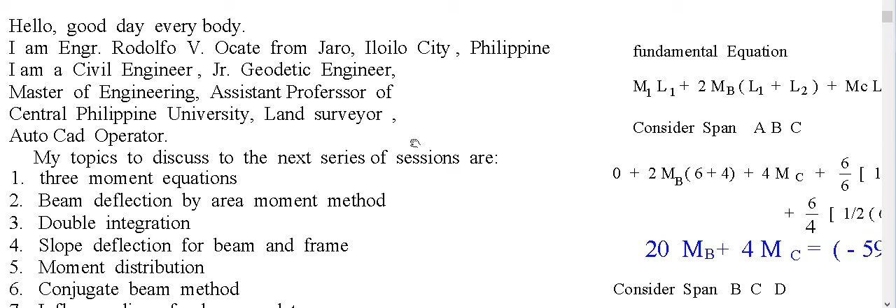My topics of discussion for this series of sessions are: 1. Three-moment equation, beam deflection by area moment method. 3. Double integration, slope deflection for beam and frame. 5. Moment distribution. 6. Conjugate beam method. 7. Influence lines for beam and trusses. Other miscellaneous topics such as hydraulics, physics, mechanics, and so on.

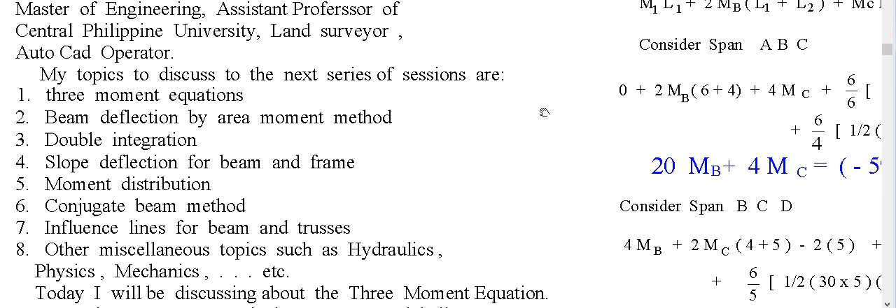Today, I will be discussing about the three-moment equation.

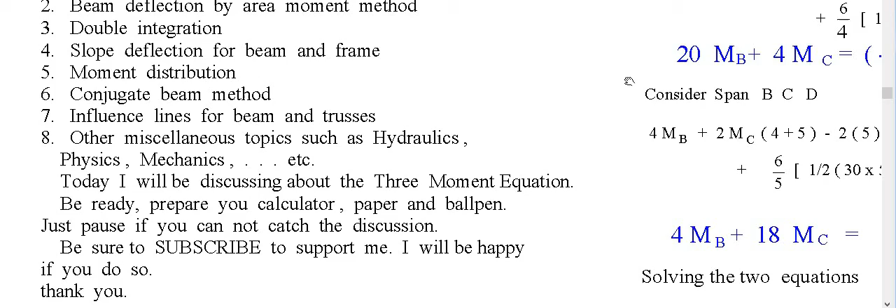Thank you. We have this first problem, a three-span beam with the loadings: uniform load of 11, 8, and concentrated load of 15 and 2. Corresponding distances are 6, 4, 2, 3, and 1. The 1 is for the overhang.

Now in this fundamental equation, we are considering two spans at a time. So L1 and L2 only, or A, B, C. Two spans at a time.

So the basic formula: we have M1, L1. M1 is the moment at A on the left. Then L1 is the distance on the left. Then twice the moment at B.

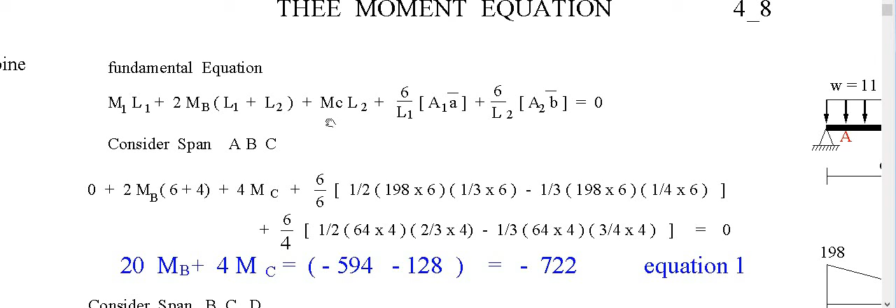Or I can say moment at B is at the center of the two spans. Then L1 plus L2 is the sum of the two spans at the middle. Then on the right, MC times L2. So MC here, then the span that we are using is L2.

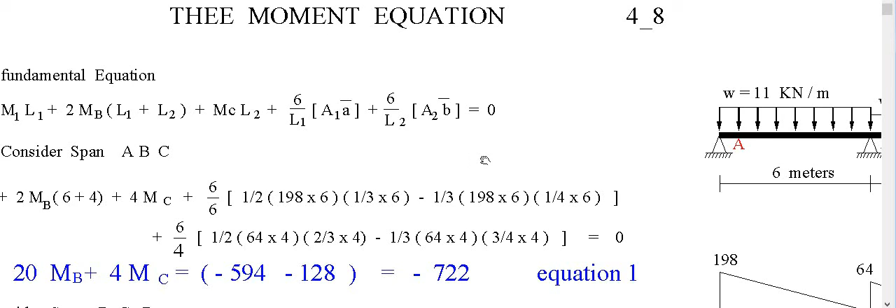Then plus 6 over L1 per span. Then area 1 times distance from the left, or A. The area 1 is this one. Area 1 is composed of two areas, positive and negative.

Then A is the distance from the left, or at A. Area 1, these two areas, times corresponding distance from the left, or A. Then plus 6 over L2, this one.

We are now considering the second span over L2. Area 2 is the area of these two moment-by-parts. Then B is the distance from the right, from here going to the centroid of this triangle. Then from C going to the centroid of this triangle.

The distance is represented by letter B. Letter A is for this one, from the left. Then equate to 0.

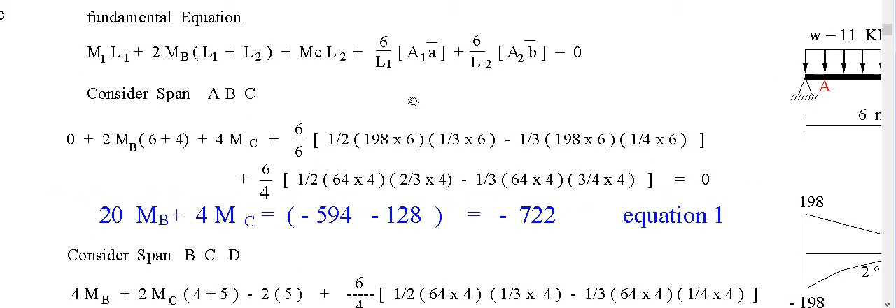Then substitute. Consider the span ABC. The first one, the moment at A is actually 0. Then twice the moment at B, distance 6 plus 4.

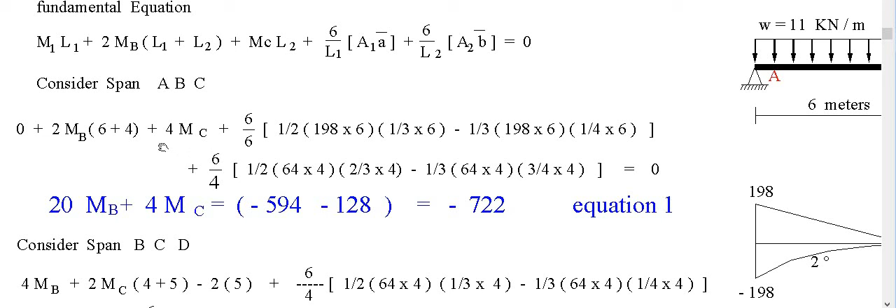Then moment on the right, 4 times moment at C, this one. 4 moment at C plus, okay, 6 over L1.

First, I have to discuss, before we go to this, how to make this moment by parts. Actually, the three-moment equation is simplified for computing the simple beam reaction at B and A using the uniform load.

Of 11, span of 6. You consider AB as a simple beam. So the total load is 66. Split that into 2, A and B. Reaction at A and B are equal.

The reaction at B is 66 divided by 2, which is 33. This is not the actual reaction at B. It is a prop or dummy reaction because we are considering this as a simple beam. Reaction at B as a dummy is 33.

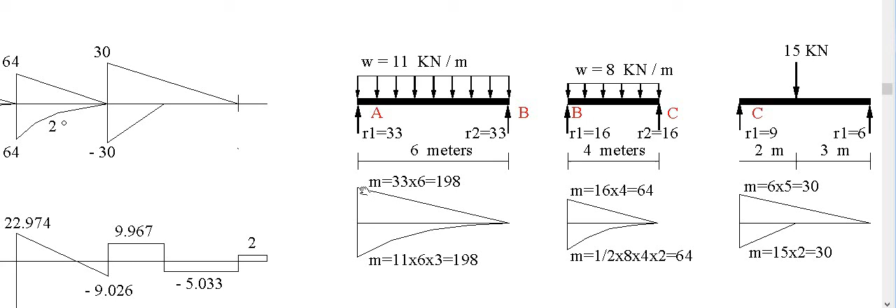This is negative, this is positive. So the sum of these two moments must be 0, because in a simple beam, the moment on the left and moment on the right must be 0. So moment must be 0 here. The sum of this positive and negative must be 0. So this is the one.

Then moment by parts on BC, consider it as a simple beam. The reaction or prop reaction at C: we have the total load as 8 times 4, which is 32. Split that into 2 equal parts. Reaction 32 divided by 2, or 16.

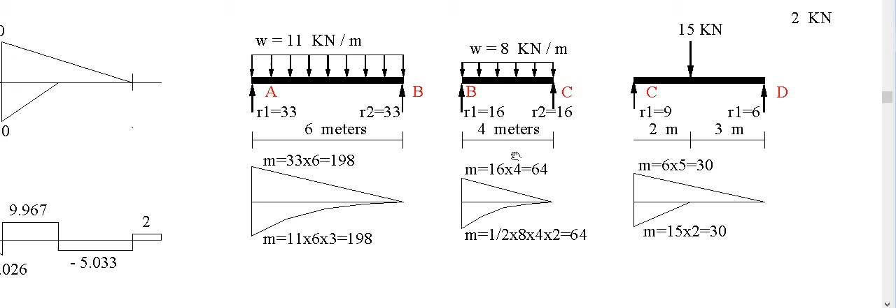The reaction at C is 16. Reaction at B is also 16. Now the force 16, if you pivot that on B, so 16 times 4 is 64. The moment by parts at B is 64. The moment by parts for the uniform load, this is a second degree, is 8 times 4 total load.

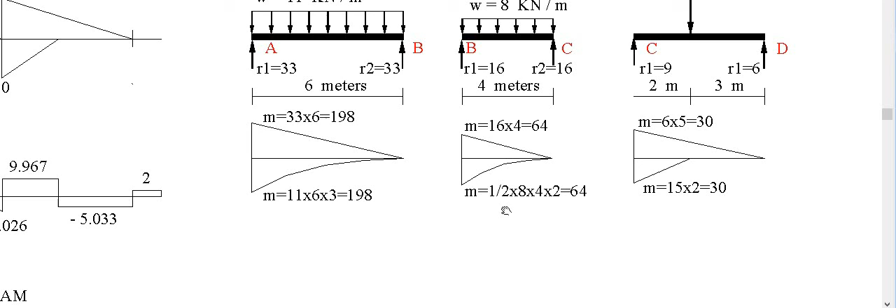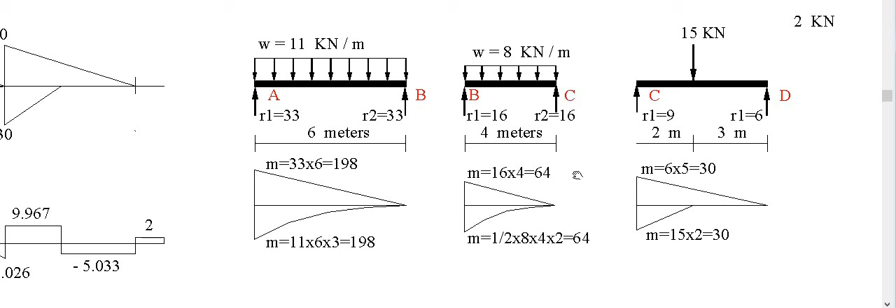This must be also 64. I think there's some correction. The moment at B is 64. Moment at B for a negative is also 64. Okay, this is supposed to be, the moment here is 8.

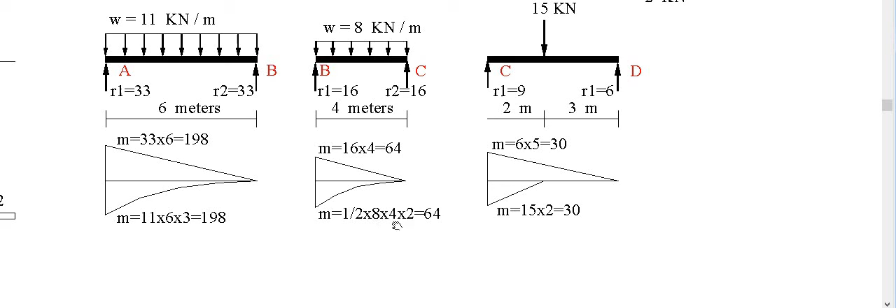8 times 4 times 2 is 64. No, 1/2.

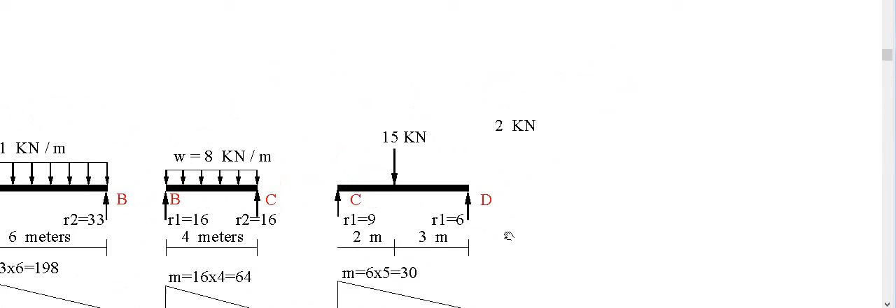Okay, for the right span CD, the moment by parts is the reaction at D. If you take moment in simple static solution for reaction at D, it is equal to 15 times 2 divided by 5, or this is 6, the reaction. Okay, simple static computation of the reaction at D. 15 times 2 divided by 5 is 6.

So that moment by parts, reaction at D, bring that to pivot C. 6 times 5 is 30. And also this concentrated load of 15, bring that to pivot at C. 15 times 2 is also 30.

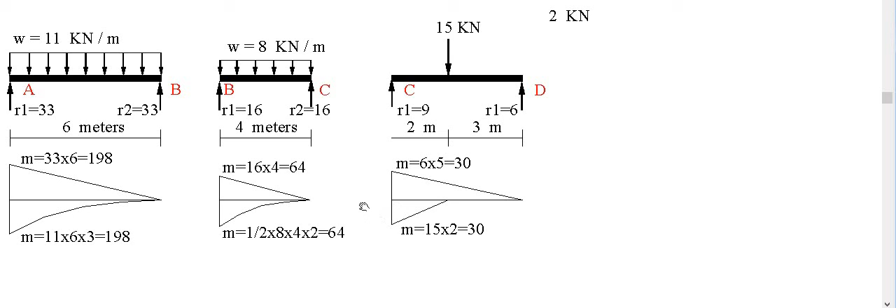This is supposed to be negative, positive. So the sum of the two moments must be 0 at C. It is a simple support. Okay, I hope you knew how to interpret this or how to compute this. 198, 64, 30, 30, 64, 198.

Okay, then substitute this to this equation. This formula 6 over L1. Okay, so we have the first span, 6 over L1 is 6. The area of this is 198 divided by 2 times 6, times the distance from here up to the centroid is 1/3 of 6, minus this lower parabolic 1/3, 198 times 6 times the distance of 1/4 of 6. This one, 1/4 distance from the left.

Then the second span, 6 over L2, which is 4. Then the area of this is 1/2, 64 by 4. Then the distance must be on the right. This is the first span, this is the second span. The origin of measurement of distance must be on the right for the second span.

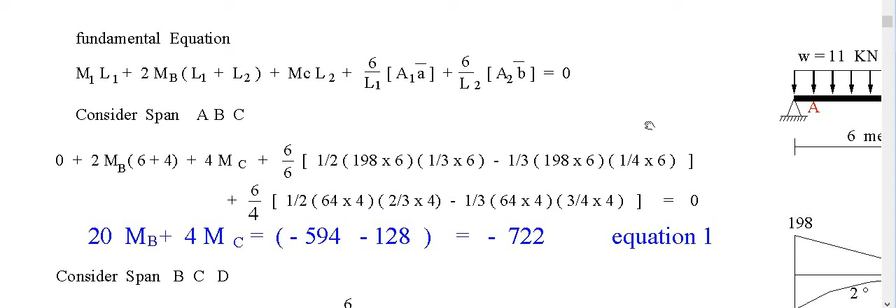Now this 6 plus 4, 10. 2 times 10, 20. 4 MC. Simplifying this term, it is minus 594. This one is minus 128. So the sum of this is negative 722. This is negative because from this equation, these two terms are positive.

Transfer that to the right of the equality of the equation. So positive here, transfer to the right becomes negative. And also interpretation of this: usually the moment at the support is negative at B and moment at C is negative. So these two terms must be negative.

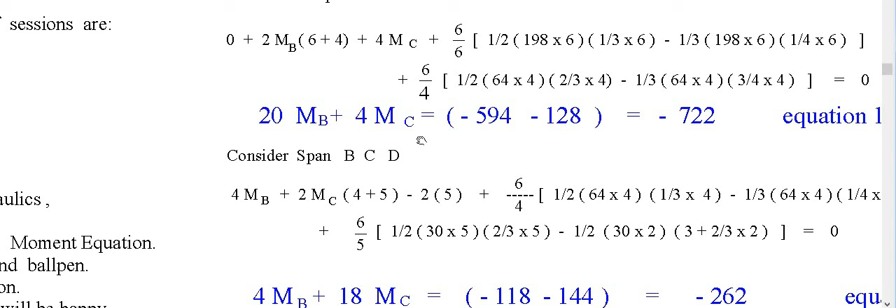Okay, negative. Then consider the second two set of span, B, C, D. Okay, these are the moment by parts, 64 and 30. Okay, we are now in the second two set of span. So the moment on the left is B, and this is unknown, moment at B. Then the span is 4.

So it is 4B, 4 times moment at B. Then moment at the center, twice the moment at C. The sum of the two spans is 4 and 5. Minus, okay, minus 2 times 5. Minus 2 is the moment at D.

Okay, I will show this to you. The moment at D is 2 times 1 and negative. 2 times 1 is minus 2. And the distance, okay, so is 5. Okay, so I will explain this.

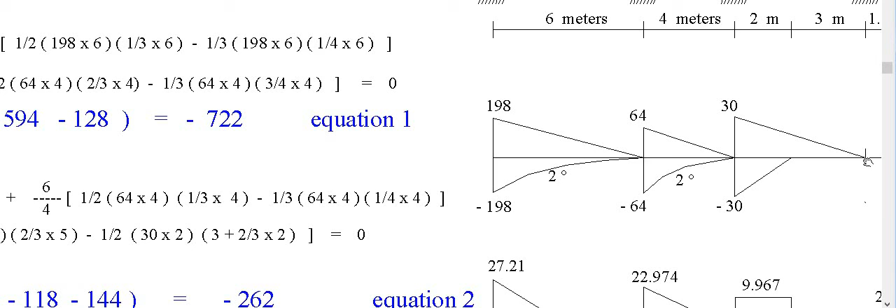2/3 of 5. Minus this triangle 1/2 30 times 2. Distance from the right is 3 plus 2/3 of 2. Again, this is 3, then 2. So the distance of the centroid from the right is 3 plus 2/3 of 2. Then the whole thing equate to 0. Okay, equate to 0.

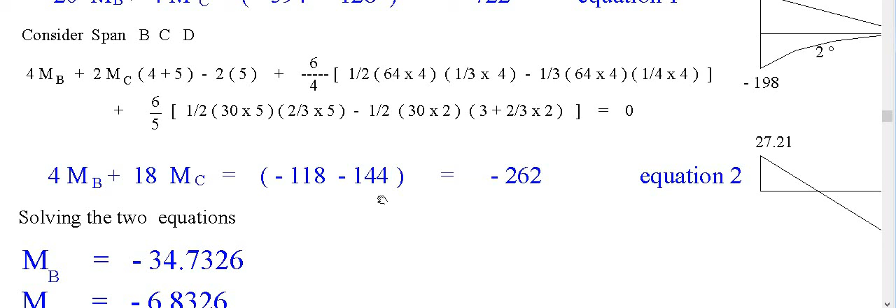Okay, simplifying, this is 4MB, 2 times 9, 18 MC plus, transfer this to the right of the equation, becomes minus. So the whole thing here is minus 118. Then the second expression here is minus 144. The sum is 262, minus 262.

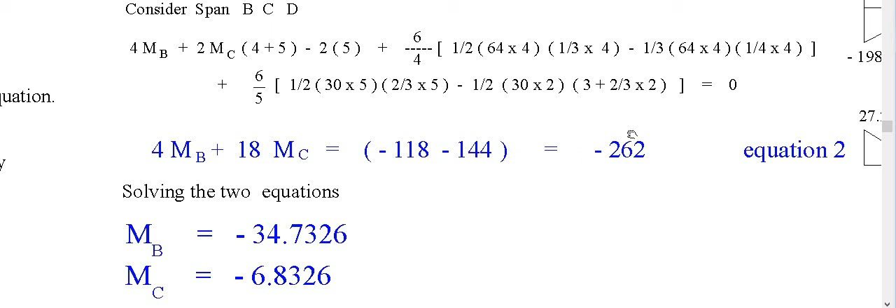Again, this must be minus since usually the moment at B is negative at the support. Moment at C is also negative at the support. These two must be negative and the answer here must be negative.

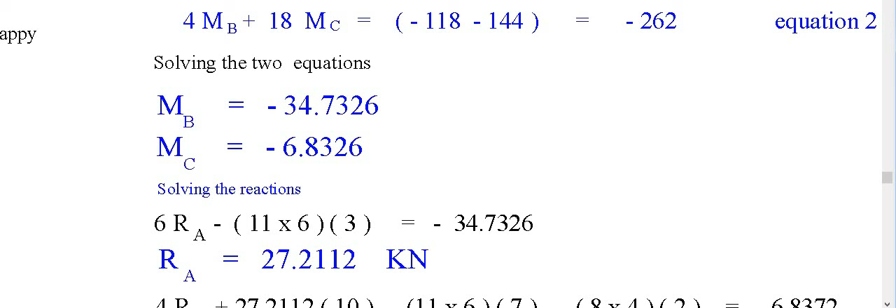Then solving the two equations 1 and 2, this is the result. Moment at B is minus 34.7326. Moment at C is minus 6.8326. Okay, simple as that. It's a tedious job, but it is simple.

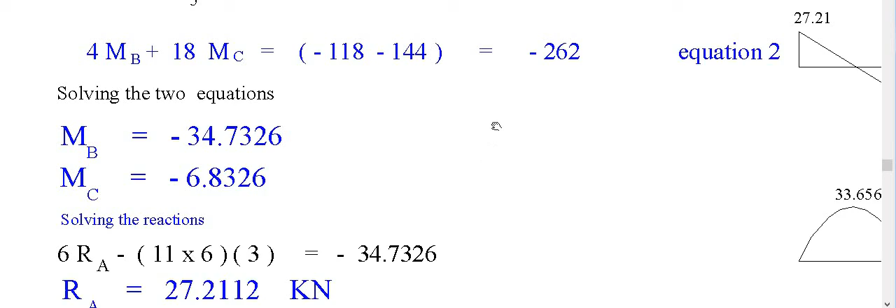Then solving the reaction. Okay, to solve the reaction at A, I have to copy this. Copy. Bring this to the...

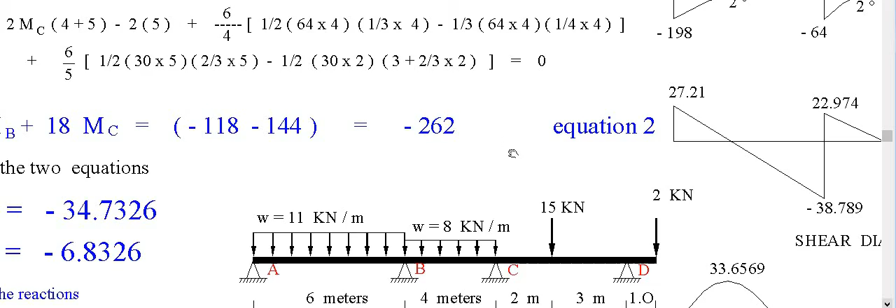Okay, reaction at A. Consider the span AB. You cut the beam at B. Consider the span AB. You cut this, then there is a moment appearing here. Don't consider this on the right. Don't consider this, just AB. And there is a moment at B. Okay, the moment at B is minus 34.7326.

Okay, so take moment at B, RA times 6 minus this 11 times 6, centroid is 3, going to B. Then the whole computation of moment equate that to the moment at B, which is minus 34.7326. Then solving for RA, it is 27.2112. Okay, so this is now solved.

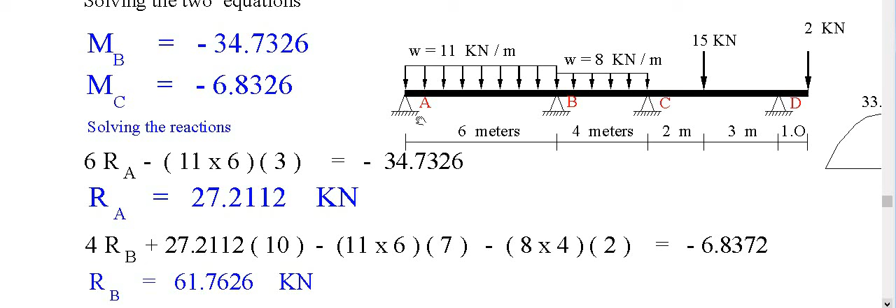The reaction, this is the actual reaction at A. Then solving for RB, consider the span ABC. Okay, unknown reaction at B. Reaction at A is already solved, 27.

Okay, take moment at C, which is minus 6.8326. Moment at C. So we have 4RB, moment due to the reaction at B. RB is unknown. Then plus the reaction at A, 27.2112 times 10, 6 plus 4. Then minus the uniform load of 11. Total weight is times 6, 66 times distance of 4 plus 3, 4 plus 3 or 7.

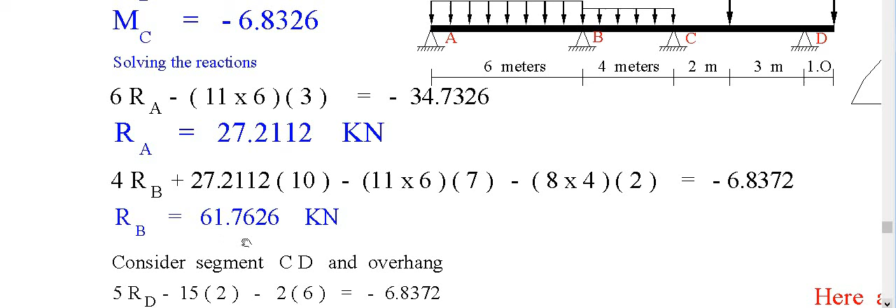Uniform load of 8. Total weight is 8 times 4. The distance going to C is 2. Then equate this to moment at C, minus 6.8372. Okay, we have only one unknown, RB. Solving, it is 61.7626. Okay.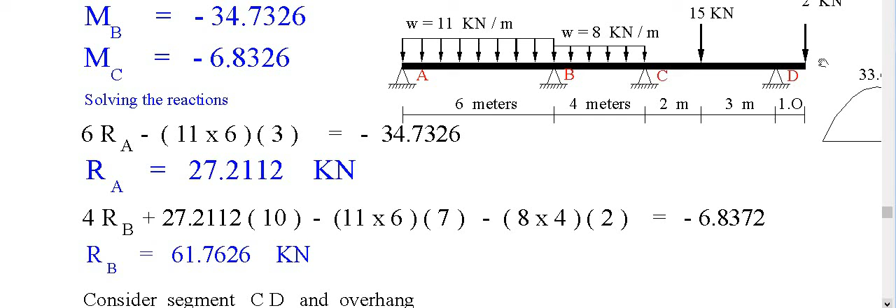Now we have to solve RD. Consider the right portion of the cut section. You cut this section at C. There appear the moment at C. Then we will solve RD on the right. Okay, CD and the overhang. Have to move this.

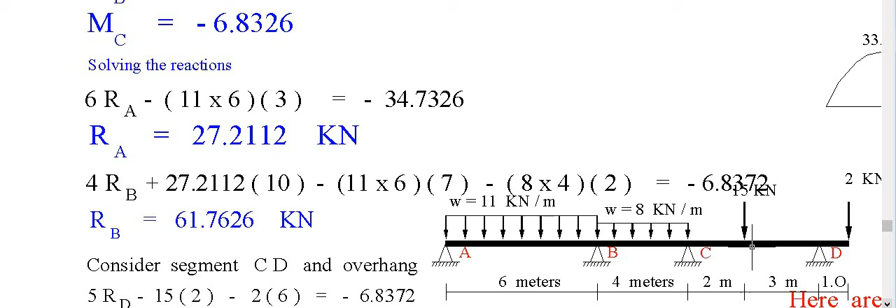Okay, RD. Consider span CD plus overhang. We have RD times 5. Okay, minus the concentrated load of 15 times 2, moment at C. Then minus 2 times 5 plus 1 or 6. Then equate that to the moment at C, which is 6 point, okay, moment at C, minus 6.8326. Then solving for RD, it is 7.0326.

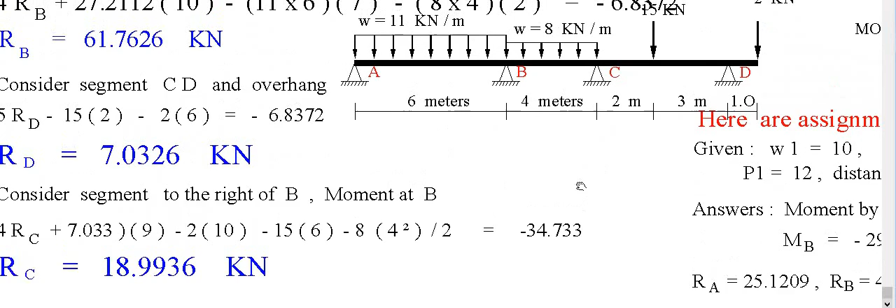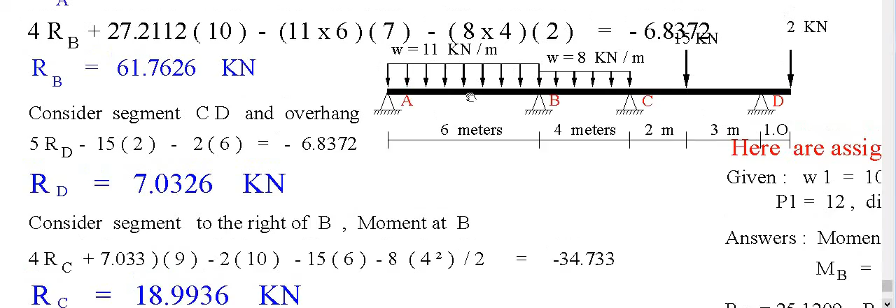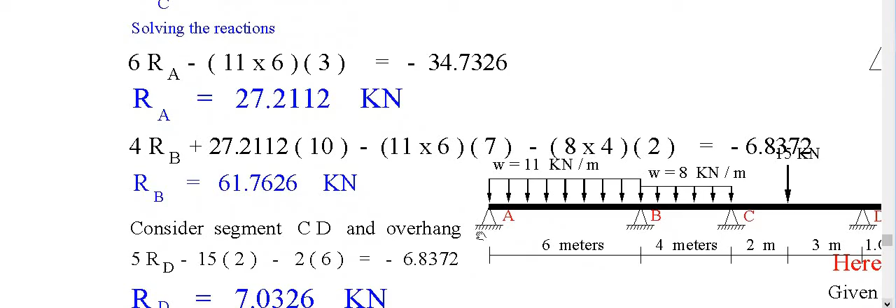Okay, then in order to solve for RC, consider the span BCD. This is given now. The RD is given, RC is unknown. Then consider the cut section BCD. So we have a moment here at B, which is moment at B is minus 34.7326.

So okay, we have RC times 4 plus reaction at D, 7.033 times 9, 4 plus 5, 9. Then minus 2 times 10, 2 times, this is 4 plus 2 plus 3 plus 1, this is 10. Then 15 times 6. This is 15 times 6.

Must be corrected. Minus this, 8 times 4 times 2, 8 times 4 times 2. One of the 4 must be divided by 2. Correction here, this must be 15 times 6.

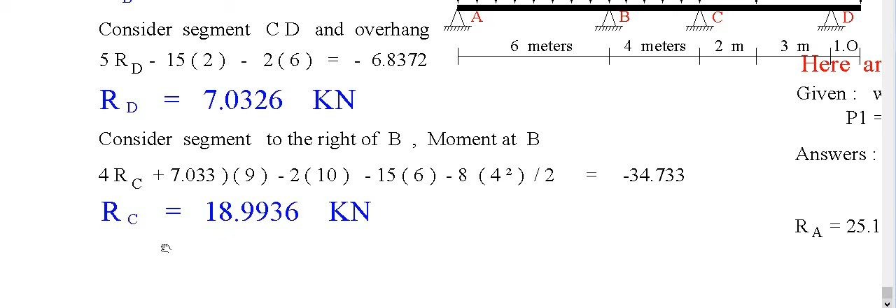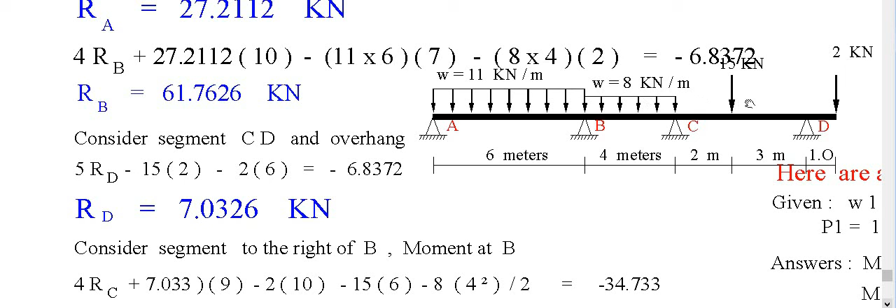And equate that to 34.733. Solving, just check this, RC is 18.9936. You must also check the sum of RA, RB, RC, and RD. It must be equal to the external load, the sum of this.

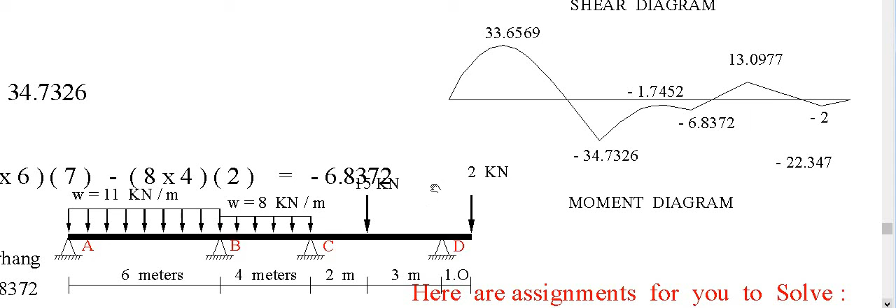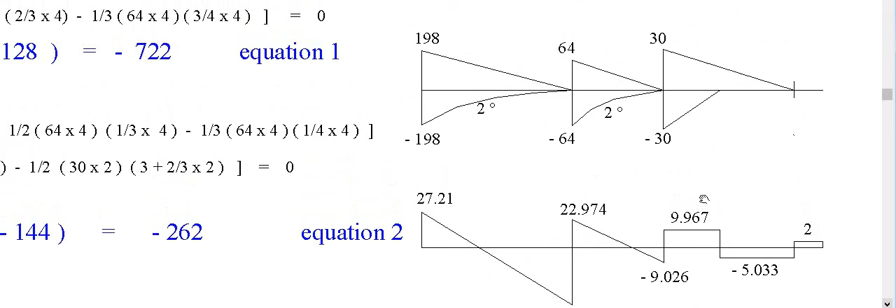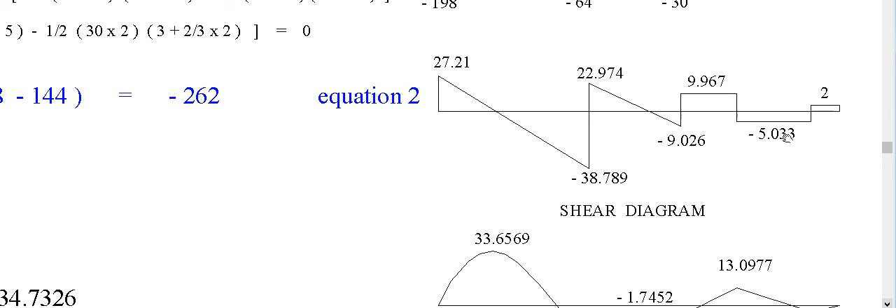Anyway, we can check this from the shear and moment diagram. So given now the forces, we can draw the shear diagram of this reaction at A, and the moment diagram will look like this. Okay, I will not discuss this because this is under the strength of materials subject. The moment diagram is this.

Okay, now that's all for the discussion or explanation on how to solve the multi-span by moment by parts, 3-moment equation. Now you have to practice this.

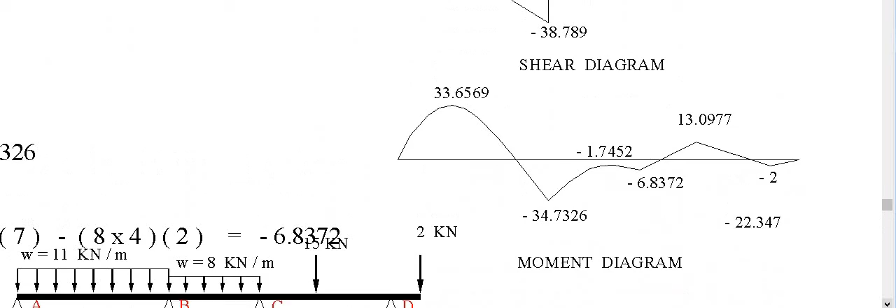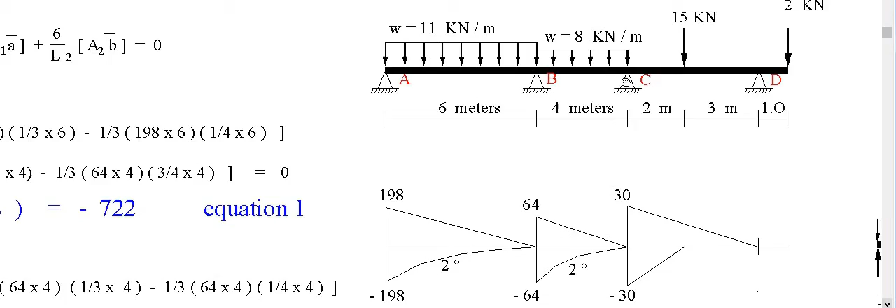Here are the assignments for you to solve. Given W1 10, W2 is 4, instead of 11, this must be 10 and this must be 4. Change that data. W1 is 10, W2 is 4.

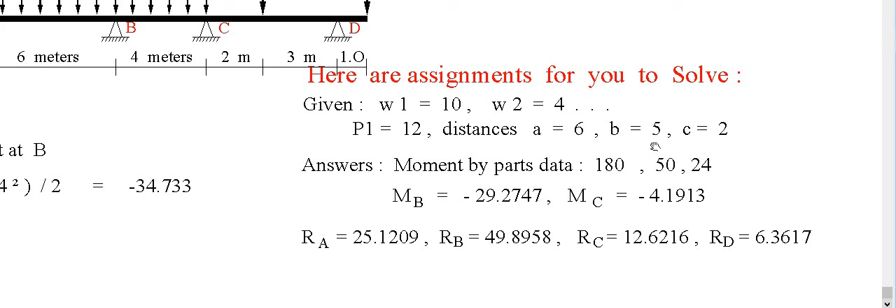Then change also the concentrated load to 12. Distance is 6, 5, and 2. Then this is hint for you. The moment by parts are 180, 50, and 24. Check this for consolation, whether you've done it correctly.

Then the answer at moment at B is minus 29.2747. Moment at C is minus 4.1913. Reaction RA 25.12, RB 49.8958, RC is 12.6216, RD is 6.3617. That's all for now.

There will be another problem for the next video.